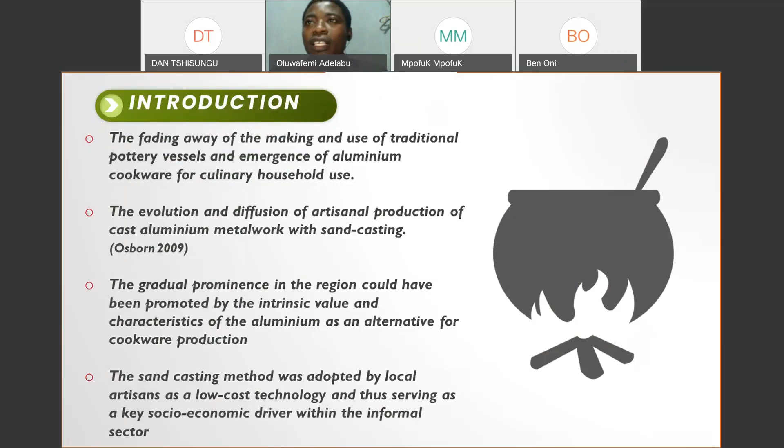With relatively less energy demand, the availability and circulation of scrap aluminum, especially at the end of World War II, enabled artisans in West Africa to develop the craft, particularly the making of aluminum cookware using scrap metal. So the craft and trade of aluminum cookware has grown and diffused into communities all over West Africa, including Nigeria. The sand casting method was adopted by local artisans as a low-cost technology, thus serving as a key socio-economic driver within the informal sector.

Today, the impact of the product life cycle on human and environmental health has become a salient issue that also needs to be addressed within the artisanal aluminum industry, with growing public concern on the safe use of aluminum cookware and an expanding amount of research showing aluminum as a potential source of toxic contamination in food.

The artisanal aluminum cookware industry is faced with a unique opportunity for technological innovation, or face technological discontinuity. Aluminum cookware produced in Saki was identified for this study, although previous studies have considered aluminum cookware made in four selected locations in Nigeria.

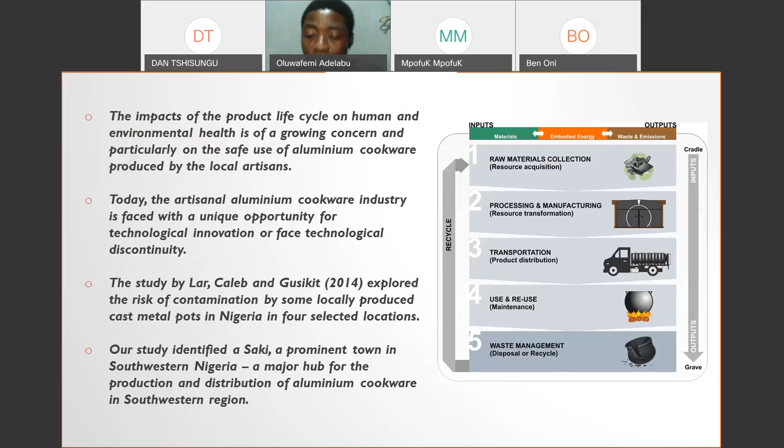We are focused on this particular town because it's a prominent town in southwestern Nigeria and a major hub for the production and distribution of aluminum cookware in the southwestern region and beyond. This is the context of the study in the Nigerian map, and Saki is located at the northern part of Oyo State in southwestern Nigeria.

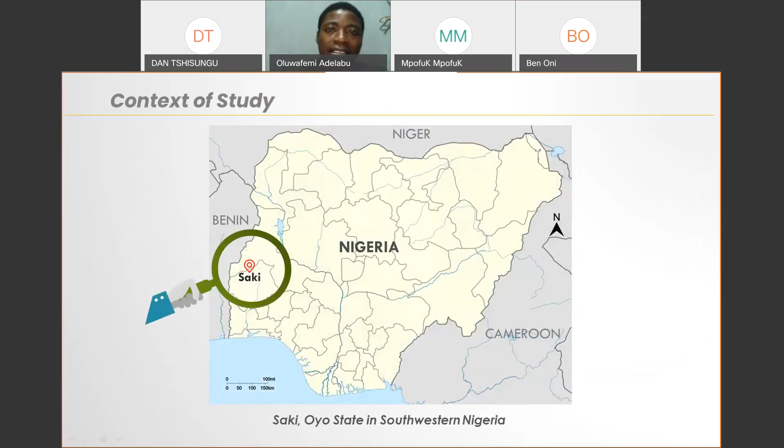Artisanal cast aluminum cookware: casting is a type of metalworking that involves pouring molten aluminum into a mold to duplicate a desired pattern. Compared to other methods such as die and permanent mold casting, sand casting is a slower process, but it's considered versatile, more economical, and probably the easiest for intricate designs.

Sand is used as it can easily be packed into any shape and achieve desirable properties such as high permeability and resistance to high temperature. In Nigeria, sand casting has become a widely used method of forming aluminum into products by artisans who adopt a labor-intensive process, harnessing scrap aluminum into a range of functional household products, notably the cast aluminum cookware examined in this study.

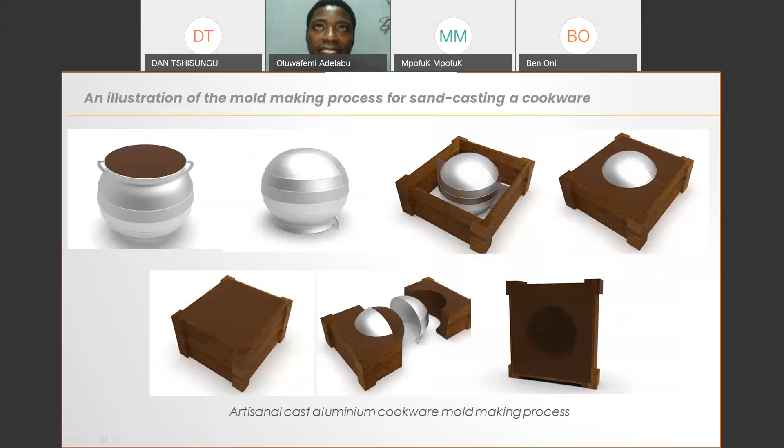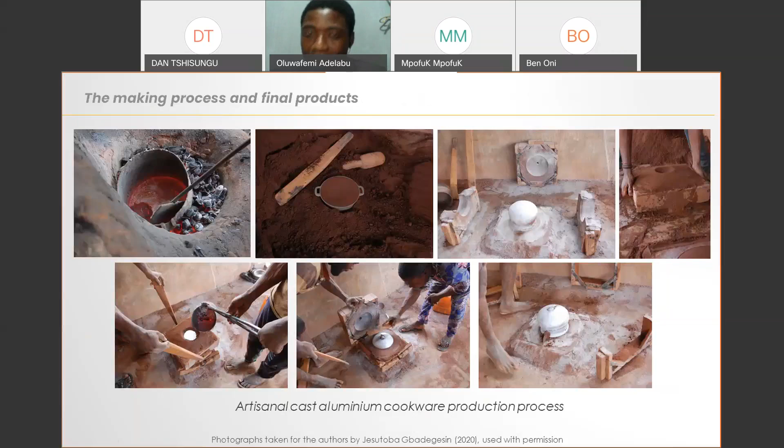There are several health effects that have been associated with exposure to heavy metals, especially through aspiration and oral intake, as pointed out in previous studies, such as that of Flora, Gupta, and Tiwari 2012, as well as Taylor, Kordas, Golding, and Emond 2017.

Manufacturing industry, including mineral processing and recycling activities, has been identified as a source of exposure to heavy metals in the environment. Aluminum is a metal that is not essentially needed for humans, as opposed to other mineral metals such as iron, magnesium, and zinc. But due to its ubiquity, human internal exposure and intake are quite unavoidable.

The informal sector dealing with recycling of metals has been identified as one of the potential sources of metal poisoning in developing nations, and there have been several studies that have pointed this out.

While there is a growing amount of evidence of the release of heavy metals from artisanal castware, more studies are required to establish the extent to which this situation is actually true, where locally made metal cookware, especially that made from aluminum, is widely produced.

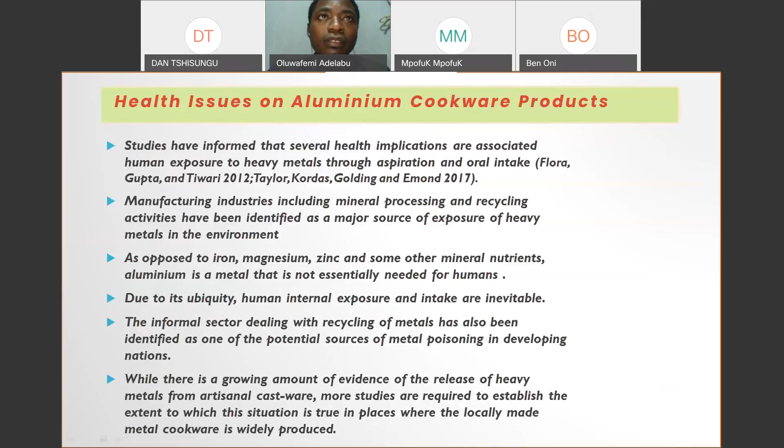In this study, we adopted an experimental method, and we selected experimental samples from cookware—two cookware samples that were specially prepared—and two commonly used additive materials. The cookware samples were subjected to water quality analysis, while all samples were characterized for chemical and microstructural properties using SEM EDX.

SEM EDX refers to a Zeiss Sigma field emission scanning electron microscope, equipped with both backscattered and Oxford energy dispersive X-ray detectors. The SEM EDX analysis was used to identify the elements present in the cookware, to confirm whether there are any contaminants, as listed by the World Health Organization, other than those expected in the core material.

So I would like to present the results that we got from the water quality test. The two cookware samples were used to boil a predetermined amount of water, and then the water was at the boiling point. The water was poured and cooled, and then the water was tested using the following parameters.

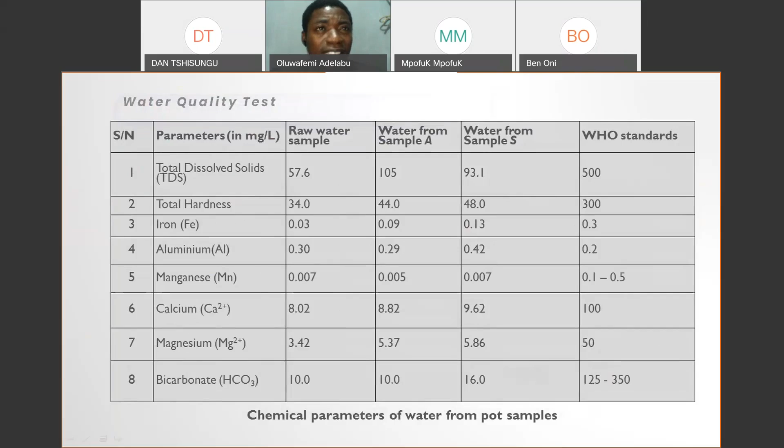For instance, for aesthetic and physical parameters, we tested for appearance, odor, temperature, pH, turbidity, and conductivity. And then for the chemical parameters, we tested for total dissolved solids, total hardness, the presence of iron, aluminum, manganese, calcium, magnesium, and bicarbonates.

These are key findings. The result from the water analysis indicates the release of mineral elements and ions from the cookware samples. However, the rate of contamination was noted to be higher for cookware sample S, and cookware sample S was actually prepared with the additives, whereas cookware sample A was prepared without the additives. So the rate of contamination was higher for cookware sample S across all the parameters, except for the measure of total dissolved solids in sample A.

The factors responsible were not established due to the limited range of tests conducted for the combined total of organic and inorganic substances present in the water sample. So overall, the level of migration of metals and metallic ions into the raw water can be considered to be minimal, in that their parameter values did not exceed the limit set by the WHO for water quality standards.

For instance, the transfer limit of 5.0 milligrams per liter for aluminum, as recommended by the Council of Europe 2013, is not exceeded even with the initial raw sample containing 0.3 milligrams per liter of aluminum. So the water test experiment was delimited, as the study did not consider acidic food conditions.

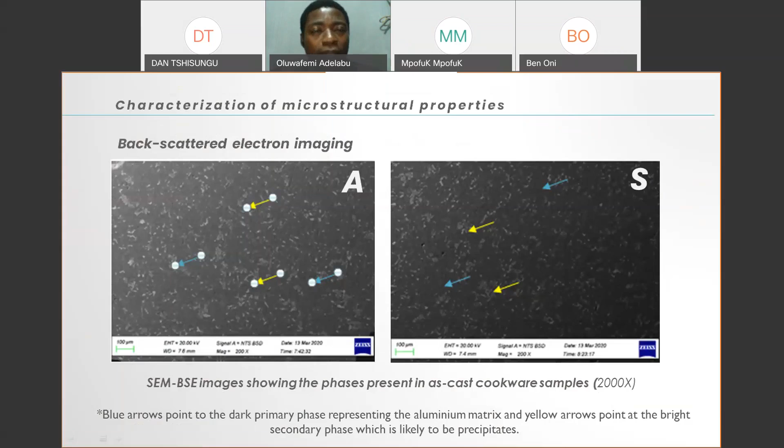So the characterization of microstructural properties using backscattered electron imaging is shown on the screen. Here we have the image from sample A and then from sample S. The blue arrow there points to the dark primary phase representing the aluminum matrix, while the yellow arrow points at the bright secondary phase, which is likely to be precipitate.

Now, these are the images of additives for casting the cookware. Here we have the wrought aluminum alloy, and then we have the black powder from the carbon zinc battery. Now, based on our findings, it can be seen that there were two phases, the light and the dark, which were predominant. The dark phase represents the primary alpha aluminium matrix, while the light phase represents a secondary phase, which is thought to be precipitate.

This precipitate enhances the mechanical properties and thermal resistance of aluminium alloy. Similar phases were found in the wrought alloy, but the precipitate preferentially settled at the grain boundaries. In the microstructure of the black powder taken from the zinc carbon battery, the bright spot areas were thought to be contaminants, as shown also in the image.

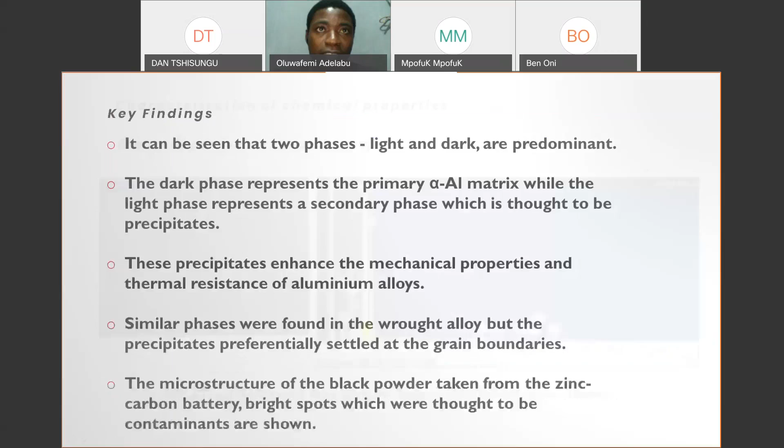Can you quickly hasten up? You spent time. All right.

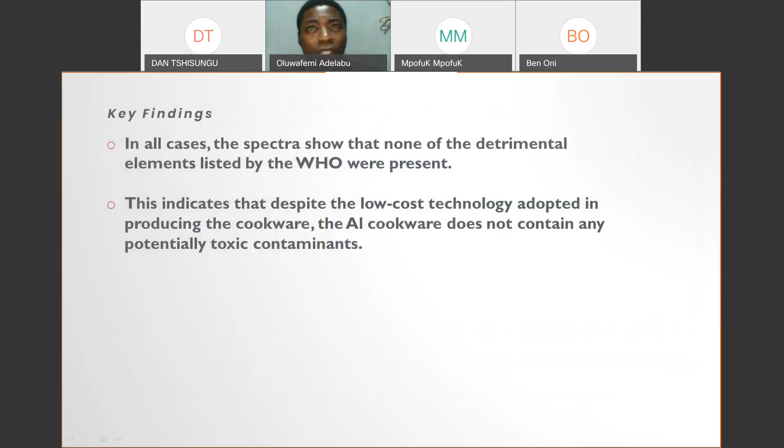All right. So we also did the characterization of chemical properties, and we did that for all the samples. Basically, in all cases, the spectra showed none of the detrimental elements listed by the WHO were present. And so this indicates that despite the low-cost technology adopted in producing the cookware, the aluminum cookware does not contain any potentially toxic contaminant.

So our concluding remark is that the preliminary test indicated that no significant release of mineral elements from the cookware was observed in case of contact with boiled water. Then the EDX result did not reveal any of the heavy toxic metals which had been declared toxic by the WHO. Now, however, we admit that further testing is necessary to evaluate the leaching effect that might be caused by cooking acidic foods such as grains and also alkaline foods such as fruits or vegetables.

So in the near future, further characterization and testing will be undertaken to ascertain the safe use of aluminum cookware, especially produced in Shaki Town. So for now, our work has demonstrated that high-tech science can be used to evaluate the work of informal artisanal production systems, and thus can support local small-scale industrial growth through safe and sustainable practices.

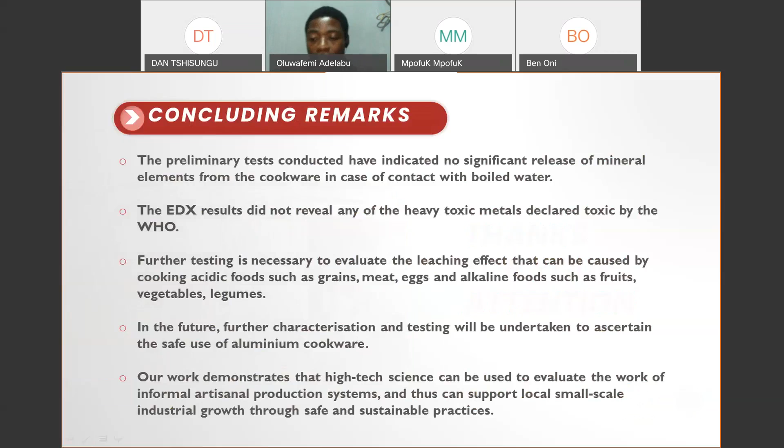Hello, can you hear me? Hello, Dan. Can you hear me? The audio is not very clear, actually. I also got feedback from some of the members in this room. The audio is not clear, so we cannot hear what you're saying. Okay. But if I can respond, yes, it's maybe clearer now. Okay.

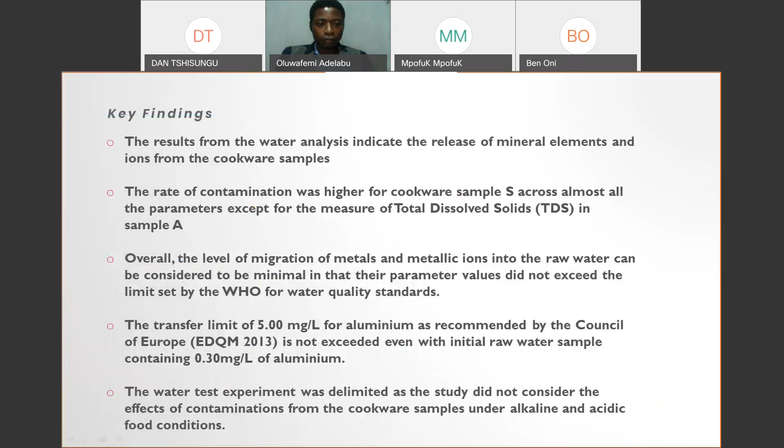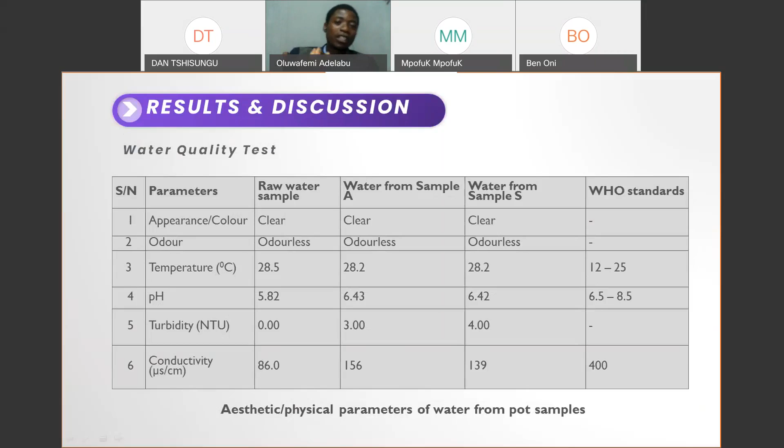Yes, if you look at the pH of the raw water sample that we used, I think that was the cause, because we had a very low pH for the raw water sample. So if the pH of the raw water sample were, let's say, 6.5, then of course the migration or the effects of putting it in aluminium, either in the condition of sample A or sample S, would still have fallen within the WHO standards. Yeah, I understand. That means you are saying we should improve the pH of the raw sample. Yes, so if we are to do further tests, we would ensure that we use water whose pH is within an acceptable range.

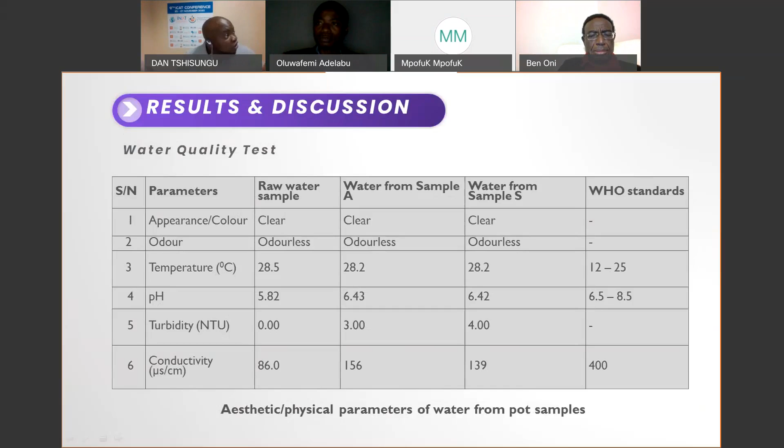Okay. My second comment was not a question. It's more of a recommendation that future research should consider sustainability assessment of cast aluminium cookware production, considering the fact that it is an indigenous technology in the country. And I'm interested because I know opportunities like this in manufacturing are scarce in the nation. So sustainability assessment in terms of looking at indicators like environmental, social, economic, technical, and the likes. All right.

Thank you very much for your contribution, sir. Yes, sir. I think I have a small question. Okay, sir. The source of the raw material, is that consistent or constant, or does it vary? It varies, sir. It varies. Okay. How do you reconcile the various sources to the results you're getting? Is your result from a particular source?

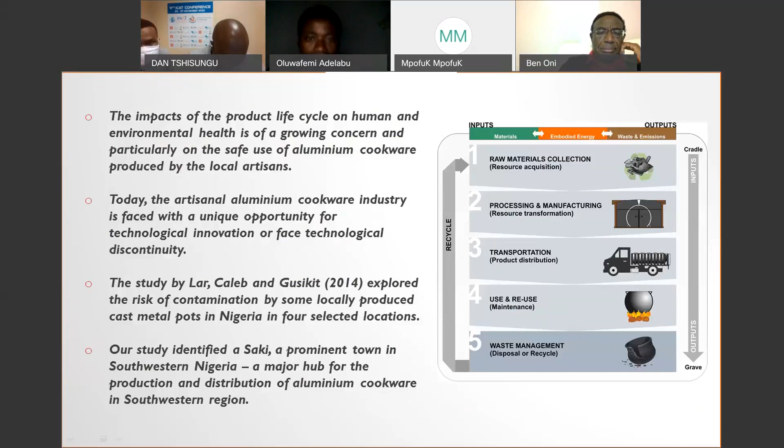Hi, yes, Ivan Brown here. Okay, sir. Can you see me there? Can you make me a panelist, please? Yes, we are doing that right away. Thanks. So you can share your screen now. Okay, let me give it a try. Okay. Yeah, we can see your screen. Okay. I think it's just the wrong side. Let me try again. And how do I get back now? Screen 2, there we go. Okay, I'm almost there. Is that correct? You can see my first slide. Yes.

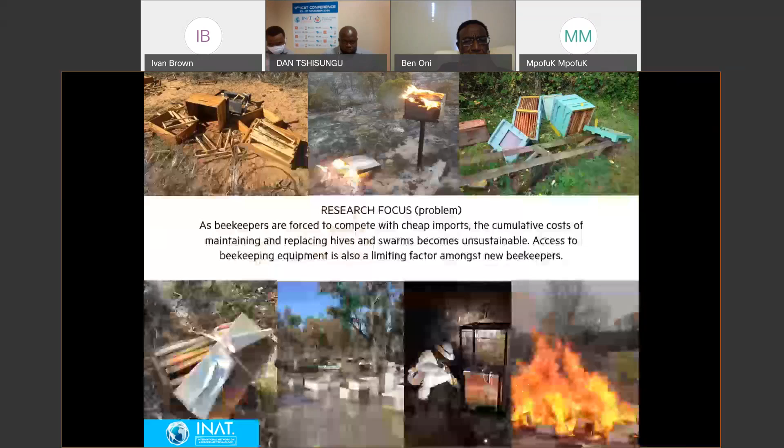The beegin project is based on the problems within the beekeeping industry. This is a very complex field that lies at the intersection of humans and insects, and which we rely on to sustain our food supplies. To summarize it very briefly, beekeepers keep bees in wooden boxes called beehives. Beekeepers have a tough time keeping these beehives and the swarms inside them alive and in good condition. They face various threats like theft, vandalism, fires, honey badgers, weathering, timber prices, and so on.

Beekeeping for development projects also struggle to achieve good results due to much of the same reasons. There are systemic issues at play involving industry policy and lawmaking at a higher level, but there is also a fundamental technology issue at the base level, which is where industrial design could really get involved.

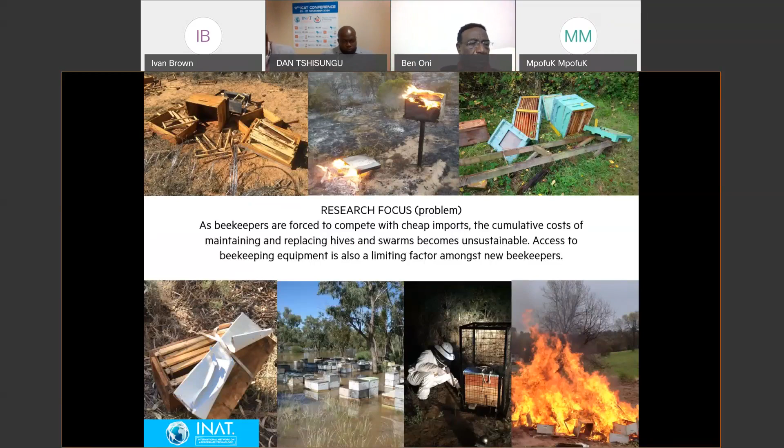The traditional beehive is a Western technology, the most commonly used one being the Langstroth style. It comes from Europe, and it is failing to achieve the desired results in the context of developing nations all over, not only South Africa. Appropriate technology became a core part of the research framework from the start, largely because of this fact, and this excerpt from the paper sums it up quite nicely.

From the initial research into appropriate technology, we honed in on two of its principles that guided the design research going forward: accessibility and sustainability. Accessible technology is affordable, ownable, operable, producible, and controllable within the community it serves. And sustainable technology is socially, economically, and environmentally maintainable and uses natural resources, capital, and labor as they are available for the long term. These spoke nicely to us in the beginning and came through all the way through the research project.

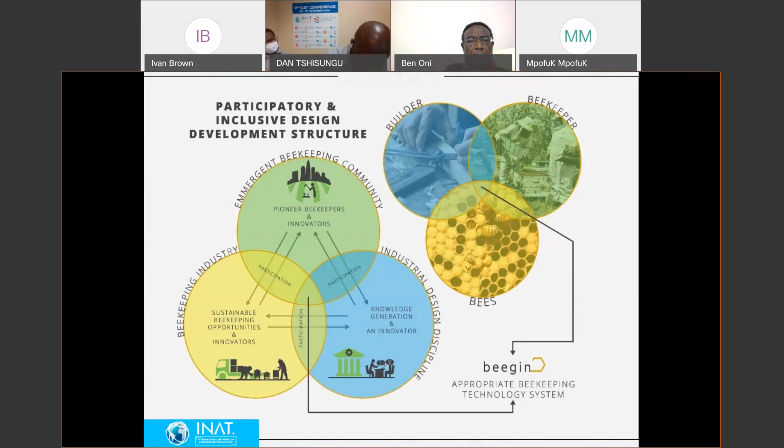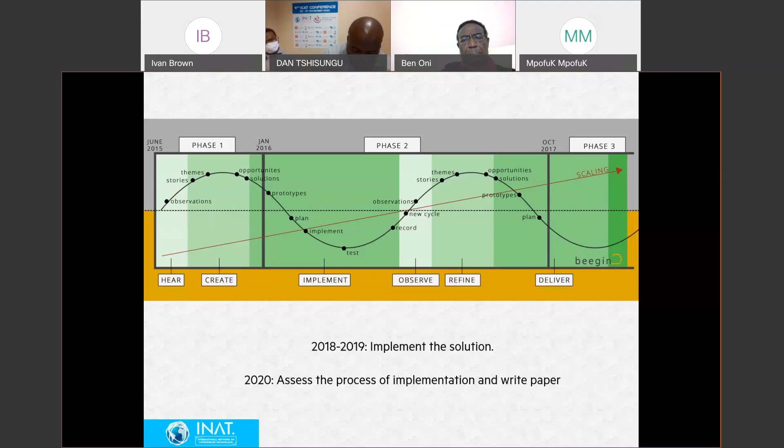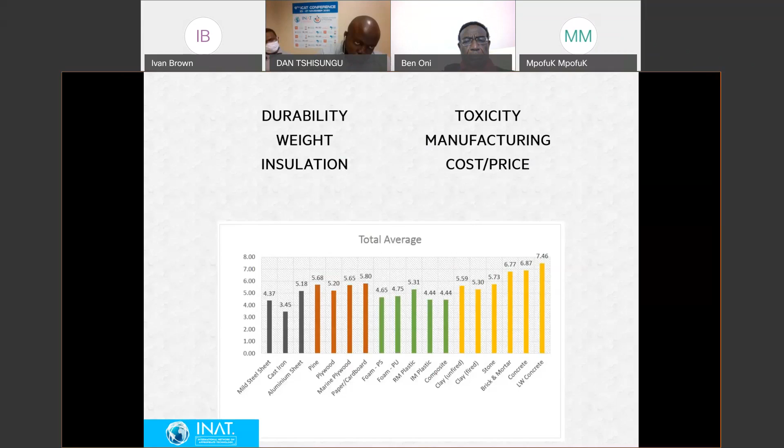To summarize the first phase of the research, we ended up looking at new materials for beehive production, assessing them based on 6 areas, each with their own very complex criteria. The result was that concrete, and more specifically lightweight concrete, came out on top. You can see it on the far right of the graph. This led to the design and production of a lightweight concrete beehive, which would be durable, lightweight, insulating, non-toxic, and low cost, meaning the bees and the beekeepers liked it, thus satisfying the sustainable technology side of the equation.

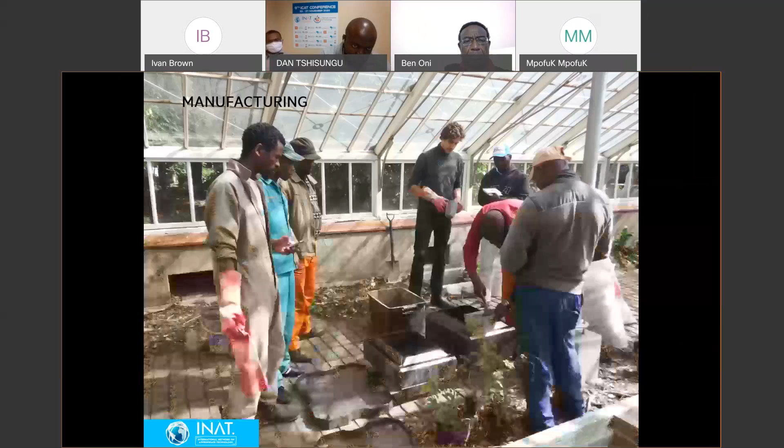Achieving accessibility lay in the manufacturing side of it. The material, lightweight concrete, was ideal because it lends itself to low-tech off-grid manufacturing. All kinds of problems could be solved by designing a set of molds that would make the beehive. This would give beekeepers and farmers the ability to make their own lightweight concrete beehives with limited technology, tools, and skills. A new idea, appropriating concrete precasting technology, has been making serious impacts all over rural areas and developing nations.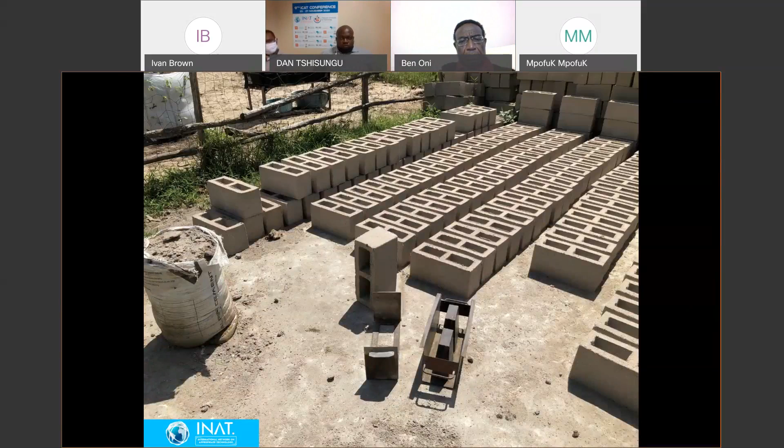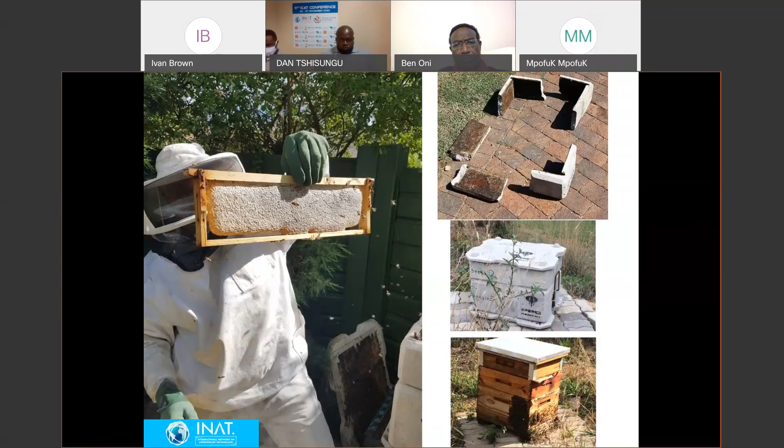I've skipped through large portions of the research to get to the crux of the paper and what we're really interested in talking about. But basically from 2016 to 2018, I worked with a range of professional beekeepers and farmers as participants in the research, and we tested the version 1 molds and beehives. Results of this initial field testing were largely positive, but there were a lot of issues we needed to refine in order to produce something that would function in a real world environment and satisfy all of these various requirements. So to solve these issues, we developed a system of categorizing the criteria and arranged them by their prevalence.

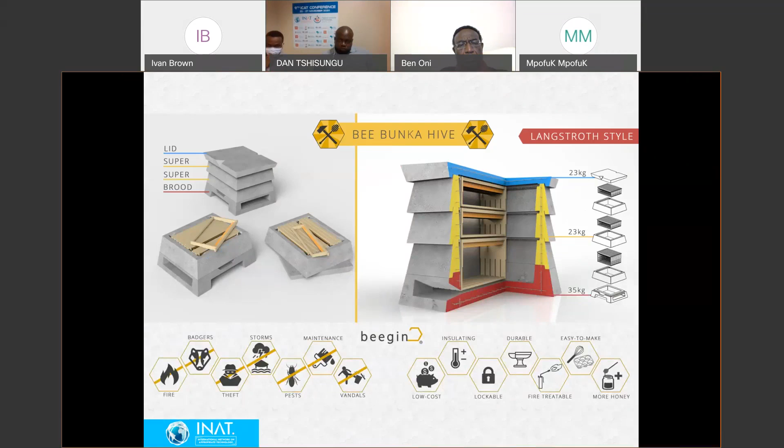To summarize, in the end it was a matter of balancing all of these requirements from each area, and looking at which was more important and which would guide the development of the technology from the top down towards the end, which would be the implementation system. This is really the end result. It's called the Bee Bunka, the lightweight concrete beehive. Really revolutionary because it's made out of lightweight concrete, and it takes all of the best parts of the European beekeeping system and improves the rest to function optimally in a South African context.

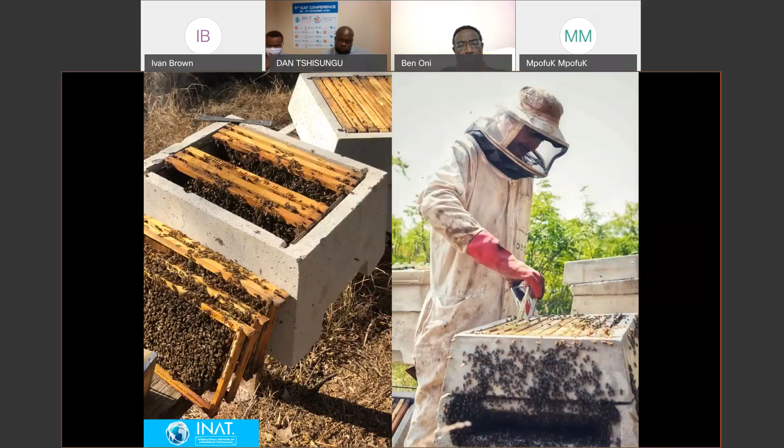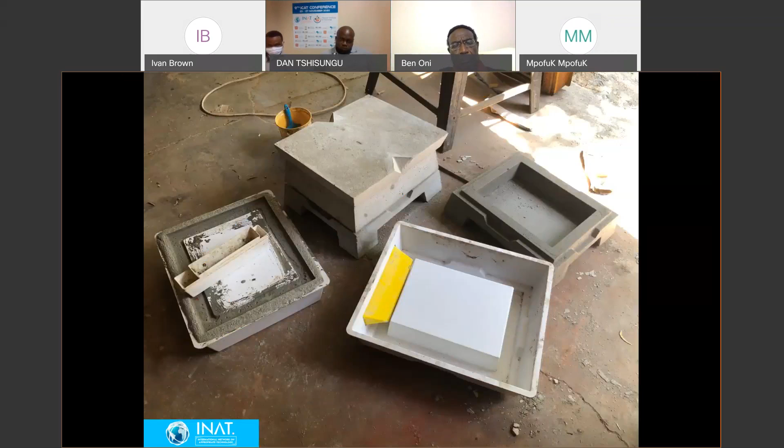We've been testing these now for over 4 years, showing that they do solve a range of the issues we were looking at. But importantly, the outcome included a set of molding tools and instructional media to help anyone from anywhere start making these beehives. These are the molds. They are low cost and capable of making hundreds of beehives. They are fairly simple to use and based on a 1-part tray mold, which is basically an ice tray mold. And this is where the true appropriate technology element lies. The beehives are not the end product. The product is the ability to produce the beehives.

To achieve impacts, we would need to get these beehives out to as many people as fast as possible in order to improve beekeeping industries all over the show. And by selling the molds rather than individual beehives, we could see an exponential increase in the adoption of the technology, because each person with a set of molds would be producing hundreds of beehives. While this is a good appropriate technology approach, it is a fairly unconventional business approach. It leads us to the implementation phase. The molds, the beehives, and a completely hypothetical business plan for implementing this as a commercial business formed the final outcomes of the master's research.

What remained was for me to get this technology into the hands of the masses. In 2018, I registered Beegin as a private company, choosing commercialization as the most desirable implementation route. The project could potentially have gone on in the university environment, scaling the project and accessing further funding, but we had a few reasons to decide against that route. For instance, whether Beegin would survive as a sustainable business would not be tested in a university scenario.

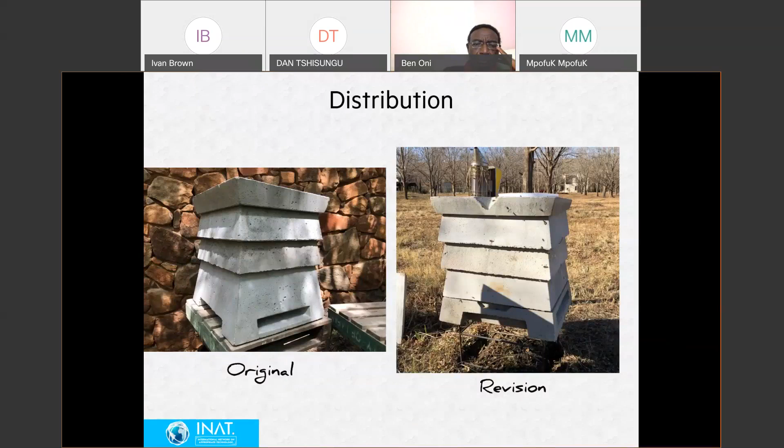Okay, so we run through financing, and then we finance through selling the beehives. Then manufacturing, there were some interesting settlements that had to be made on the manufacturing side. Distribution, we had to edit the design and the system a little bit to fit in with international distribution systems.

And then we kind of close up with training and adoption and how it's gone from 2018 to now, with people adopting the technology and developing their own systems for using this new technology in their businesses, and how we've been sort of adjusting Beegin as we go along with it.

In the end, basically we're in 15 countries with 155 mold sets. And so the impact is starting to be seen, although the business has been scaled at a very staggered and slow pace, which is part of why perhaps it's managed to get to where it is and not fail in the first couple of years.

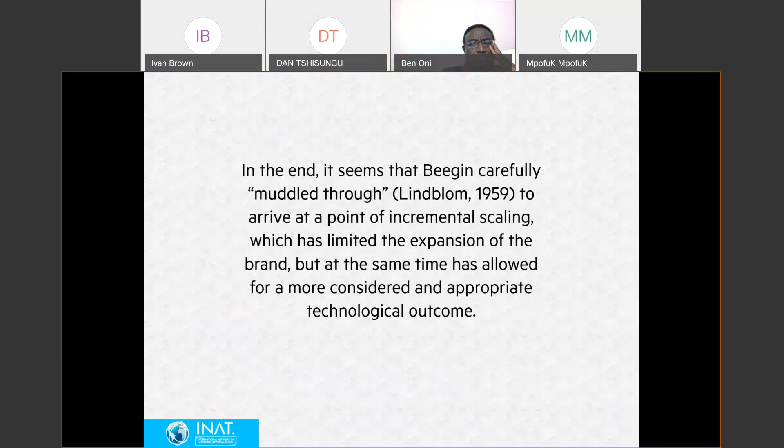So I guess this kind of sums it up. In the end, it seems that Beegin carefully muddled through to arrive at a point of incremental scaling, which has limited the expansion of the brand, but at the same time has allowed for a more considered and appropriate technological outcome. Yeah, thank you.

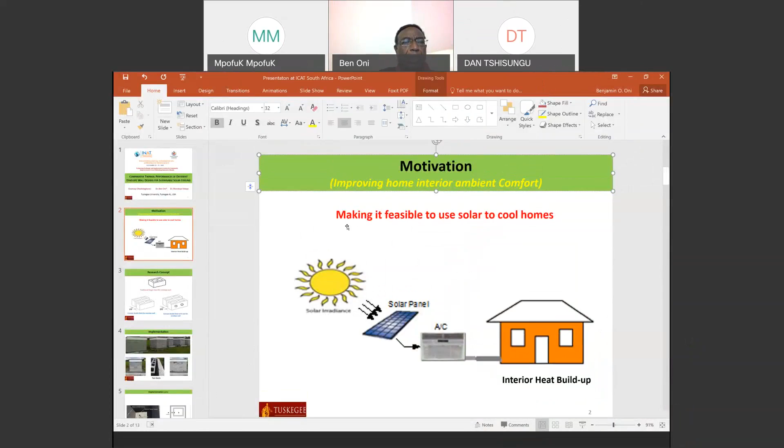All right, good afternoon over there, everyone. The title of our presentation is Comparative Thermal Performance of Different Envelope Wall Designs for Sustainable Solar Cooling.

The motivation for this project is actually to improve the interior ambient comfort in African countries. We want to make it feasible for solar to be used to cool homes. We have a lot of heat in Africa and a lot of sunshine as well. The heat from the radiant energy from the sun produces a lot of discomfort in homes.

But at the same time we see the light coming from the sun as well, that it can be used to cool the homes. But the way we build homes right now in most of Africa using cement block, it is not actually financially feasible to use solar to cool the homes. It's going to be so expensive because the blocks serve as a heat reservoir. So when the sun hits the walls, the energy is stored into the bricks, and the energy is released later in the day and at night, and it makes it very uncomfortable for people to enjoy the ambient temperatures.

So what we thought we should do is find a different way to arrange how the envelope walls are configured. In industrialized countries, this is not a problem. They can always use insulators. It's plentiful, and the way they build in industrialized countries is such that they can always add insulators in the process, so it's not a problem for them.

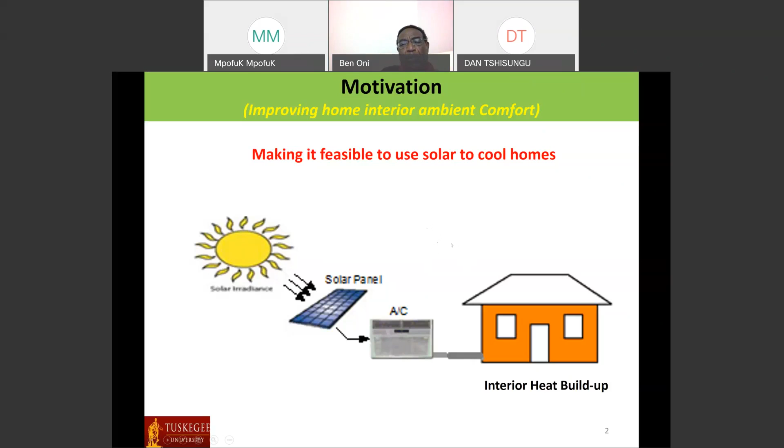But in most of Africa, I haven't seen that abundance of insulators, as well as the way we build using cement blocks, where you can actually put that insulation. So we thought we should use a concept of double walls, and then see financially how that would compare with the single wall, and at the same time cooling it.

So traditionally, you see the single wall. This is what is used for the outside of the house, or the envelope. So we're thinking, instead of using a single wall, why don't we use a double wall with a space on it, and that space acting as a heat barrier. And also, why don't we put a hole in the outside one to take advantage of convection? So these were the plans that we had.

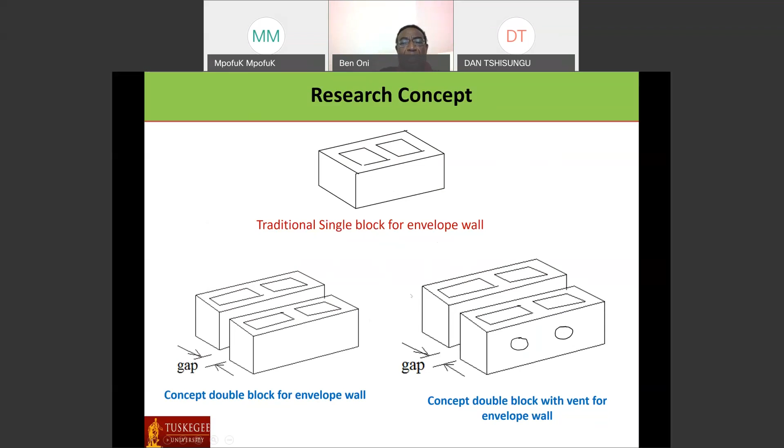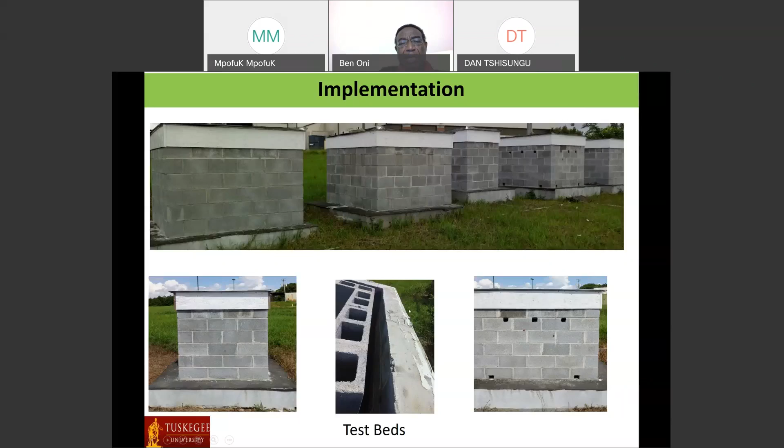So we decided to implement it, and here you see where we actually built different mini structures, double walls, some of them with holes on it as well, some without holes, some with different sizes of separation. We just wanted to know the impact of how wide these spaces are and what that means in terms of energy reduction. So we built this, and in the process we had sensors installed in many different places in many structures. We had sensors on the wall, a sensor right in the middle, and a sensor outside.

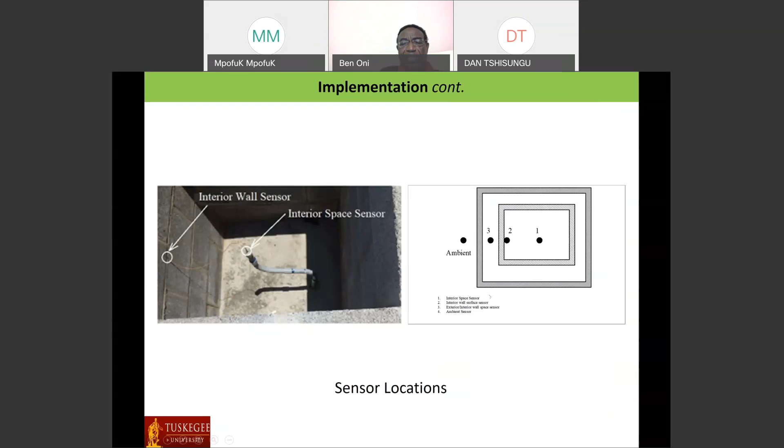So this right here illustrates where we had our sensors: in the middle, in the wall, in between the exterior and interior walls, and then of course on the outside. So that's where we install our sensors. And we took readings for several months and days and nights, and we took the averages.

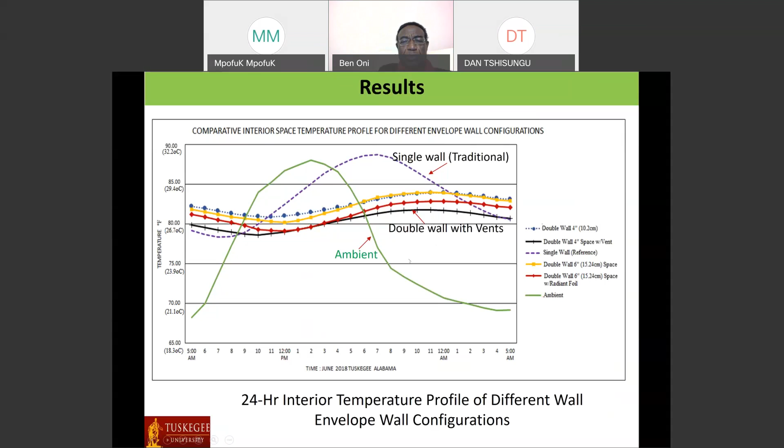So using this, we took the best of the different configurations. That's double wall with vent. There were other configurations I may not have focused on, but there were double wall without vent, double walls that were 6 inches apart, double wall that was 4 inches apart. So we had different configurations, but the best of them was the double wall with vents, staggered vents.

So you could see, if we pull them together, you could see the temperature profile over a 24-hour period, the average of a double wall with vent. The temperature really never got, this one got to maybe about 84 or 83 degrees, whereas for the single wall, it got to about close to 90 degrees.

So in our analysis, we established, I guess, a level of comfort. We call it comfort zone, 75 degrees. This is arbitrary, just to let us know how much energy we're talking about inside the house using the different configurations.

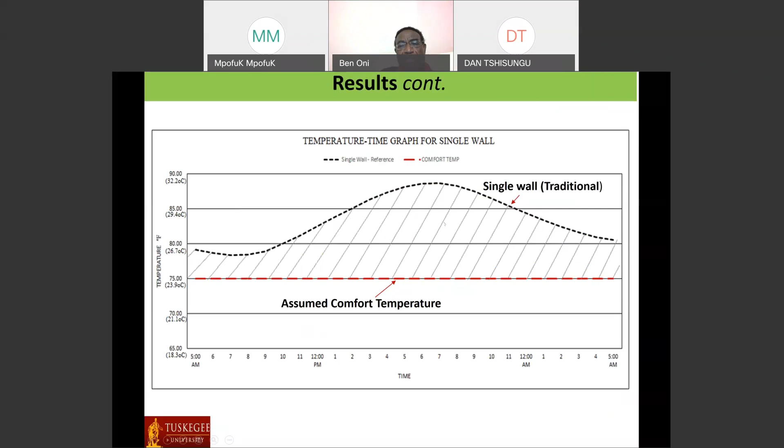So we compare that for the various configurations. And after we did that, when we did some cost calculations, for the single wall, for example, the traditional one, we see in our calculation what it will cost us to buy the solar panels. For the double wall with vent, this is the difference in cost, about half of that. For the double wall without vent, this is what it will cost. For the double wall 6-inch spacing, that's the cost, and so on.

So we had this analysis. This also impacts because of the cost of the solar panel, which is one of the calculations we made, but there was also the cost of AC that we needed to take into consideration. Because of the higher energy that is stored when we use a single wall, obviously the AC unit will be bigger, and that is the cost. And for the double wall with 4-inch vent, you see that the size of the AC unit will be a lot smaller. So we did all the calculations as well.

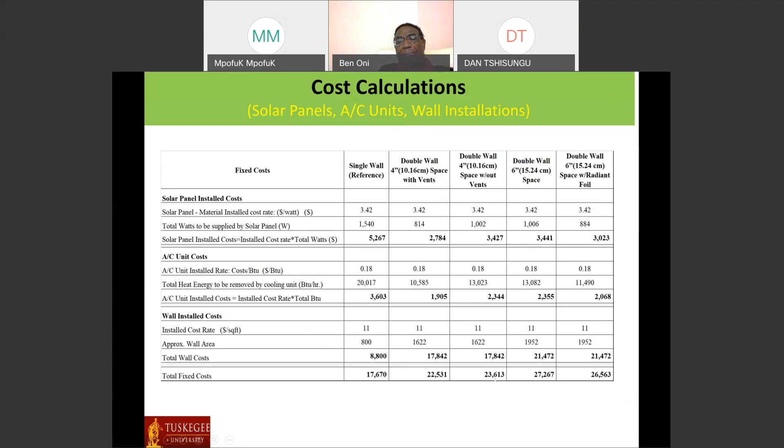And then we also did a calculation on the installation cost. So we see that for a single wall, for example, this is our cost, whereas for a double wall, the cost actually about doubles or so, or quite higher. So we did all of these calculations.

And then we went further now to say, okay, if I had these different walls side by side, and I was going to operate them 24 hours a day and maintain a temperature of say 70 degrees or 75 degrees, what will it cost to cool the house? So in terms of energy, we find that there is an annual operating cost. It will be much higher for the single wall because I have to remove a lot of energy internally.

But for the double wall with vents, I don't have to remove as much energy because in the first case, I did not have as much energy. So we compared all of them. So this now gave us the cost of operating the house.

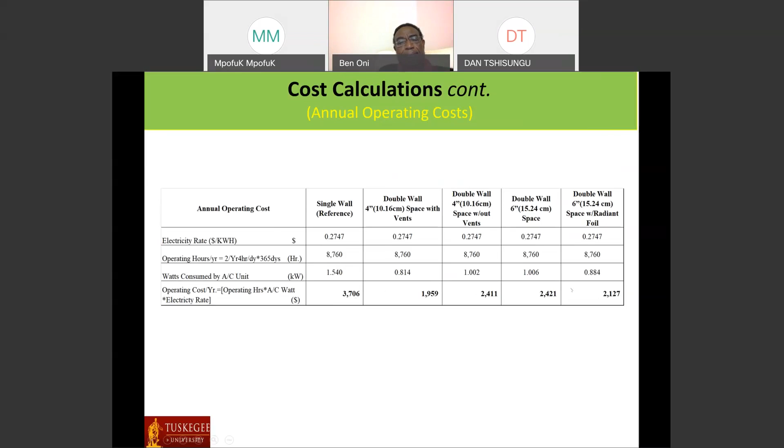12 minutes have been fast spent. Can you quick round up, Doc?

How many minutes did you say, please? Twelve minutes have been fast spent. Oh, twelve minutes already, okay. All right, so I'm almost done, actually.

We took into consideration the fixed cost and the operating cost, and we projected that with time, just to find a break-even point.

For the case of the single traditional way we build in most of Africa, which is the red line here, and the double wall, which is the black line, the cost starts up a little bit lower, but with time, taking into consideration the energy cost, you see that it goes much higher.

The black dotted line here is the cost of the double wall with vent. The cost is slightly higher initially, but you see that with time it's less than the energy cost we're using for the single configuration.

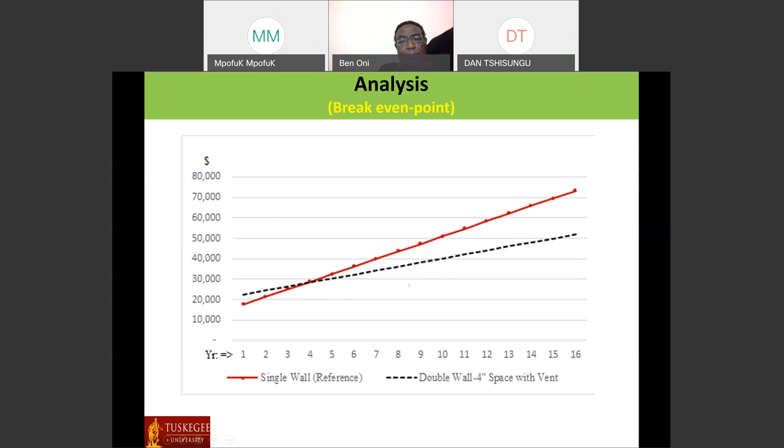So to conclude, the study focused on an environmental temperature of 75 degrees and above. The experimental data we collected shows that the building interior of the double wall with vent is about 47% lower than the building interior of a single wall envelope in terms of energy stored inside.

As far as the break-even point is concerned, if we build the house with a double wall, talking about a typical bungalow, and we are electrifying it or cooling it using solar, in about 3.5 years or so we should be able to recover the extra money we put in using a double wall.

We also did a companion study, similar, but using a double roof. We found that if we used the same concept of a double roof instead of a single roof, the attic temperature was reduced by about 12.26 degrees.

So we see that we don't have to endure all of that heat that we do in most of Africa. If we put in a little bit of money to build a double wall and use solar, in the long run we should have better ambient comfort in our homes.

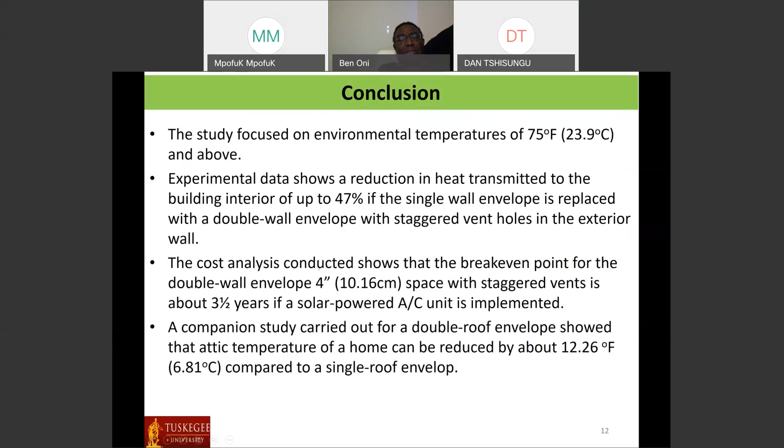So this is my presentation, and I'm open for questions. Thank you very much. You're welcome.

That's a very good presentation. I don't know if there are questions from the floor. Questions, comments, contributions? Good evening.

Good evening. Yes, sir, I can hear you now. You have been trying to speak, but network is not favoring. You are welcome, sir. Okay, I just have a question for Dr. Ben.

What I want to ask is that the solar for the double wall, the solar placed in between the walls, can it be used to generate a source of power?

I mean, yes. If you look at this view graph here, the solar panel is actually used to generate the power, and that power is used to drive the AC. To get to your question, yes, it is a power generator.

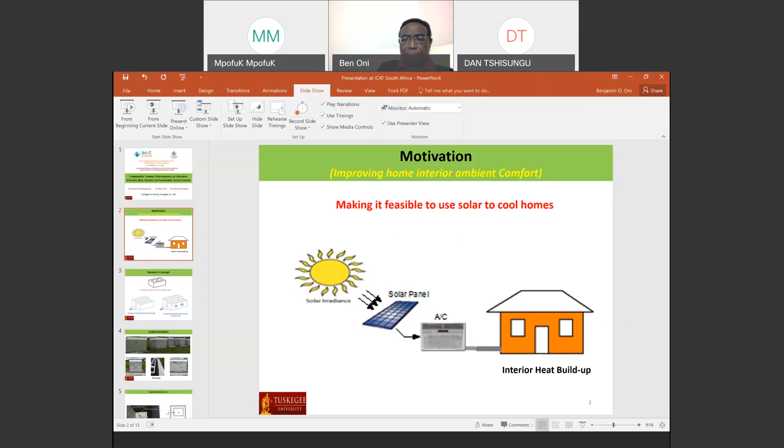Without wasting time, I would like to call the next presenter, presenting article on effects of injection parameters on cavity pressure, tensile, and microstructural properties of plastic reinforced composites. The authors are Adefemi Adeodu, Grace Rendani, and Ilesomidani. I don't know if any of the authors is online. Yes, Adil is available. Okay, thank you so much, sir. Thank you, sir.

So, you can share your screen now. Okay. Can you see my screen now? Yes, your screen is clear. Okay, that's good. Thank you.

Once again, I'm Adeodu Adefemi, affiliated to University of South Africa, Department of Mechanical and Industrial Engineering. I'm presenting on effect of injection parameters on cavity pressure, tensile, and microstructural properties of plastic reinforced composites. The outline of my presentation will be on introduction, the statement of the problem, methodology, discussion of the result, the conclusion and recommendation.

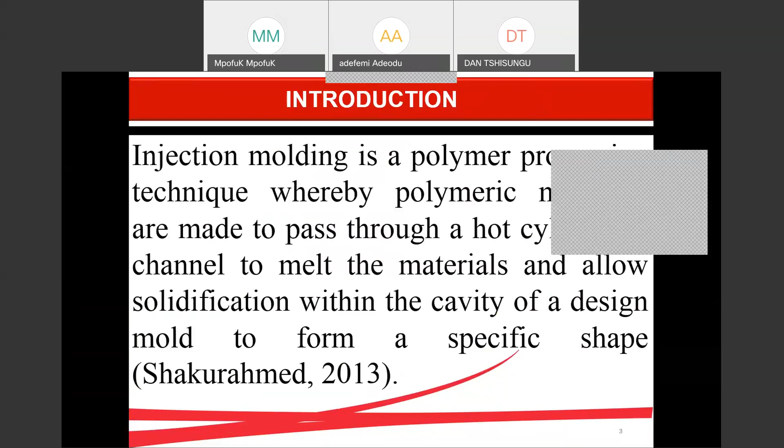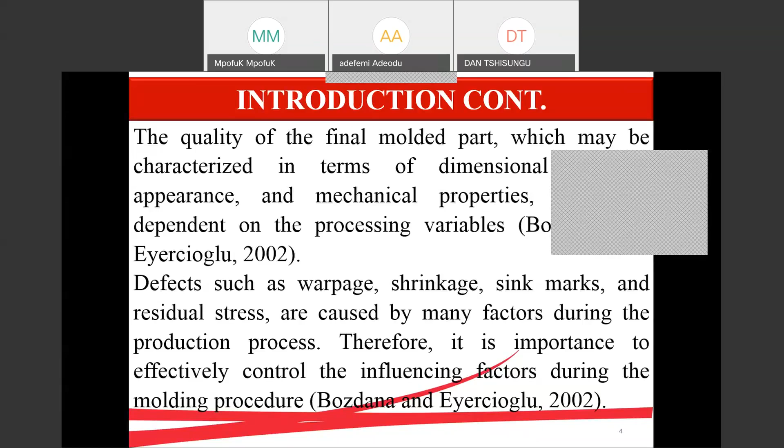But the bone of contention, the motivation of this work, is centered on the defects, the problems that engineers are experiencing as a result of the processing parameters used in injection molding. Defects such as warpage, shrinkage, and residual stress are caused by many factors during production, and it is therefore important to effectively control these influencing factors during the molding procedure, according to Bozdana and Eyercioglu 2002.

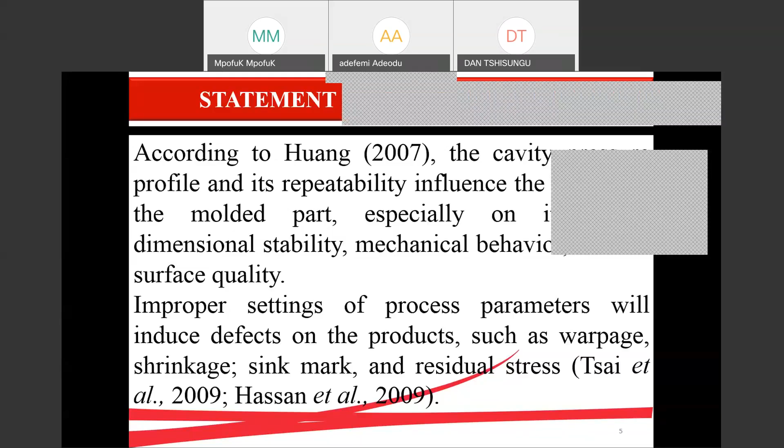So our focus in this research is to look at the effect of these parameters, the injection pressure and time, on the cavity pressure, and also the mechanical and microstructural properties of the product. We are looking at two materials: aluminum mixed with low density polyethylene, and carbon black mixed with low density polyethylene at different injection temperatures.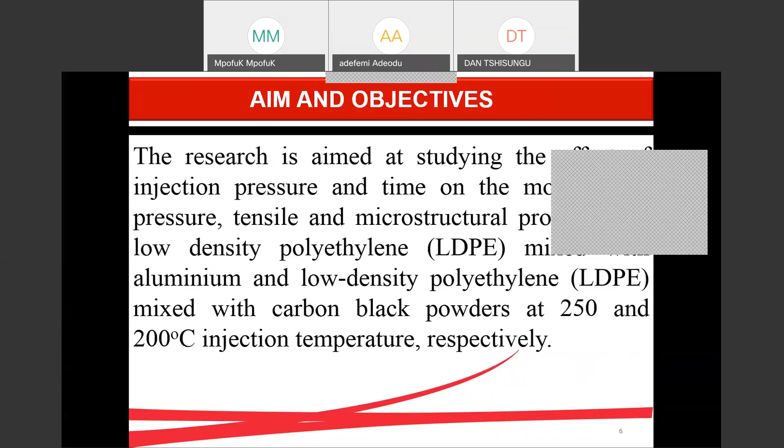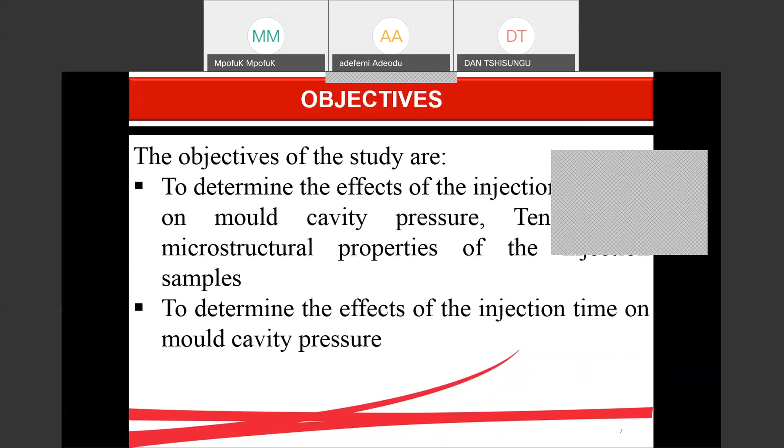So the objective of this study is to investigate the effect of injection pressure and time on the cavity pressure, tensile strength, and microstructural property of low density polyethylene mixed with aluminum and low density polyethylene mixed with carbon black powder at 250 and 200 injection temperature respectively. The objective of the work is to determine the effect of the injection pressure on the mold cavity pressure, and also to determine the effect of the injection time on the mold cavity pressure.

Some work has been done in a similar area by some authors, like the work of Wen-Cheng et al. 2000, which worked on the effect of injection pressure and holding time on the dimension and surface flatness of a specific material, and the result of the work shows that

You have 4 minutes. You have 4 minutes left.

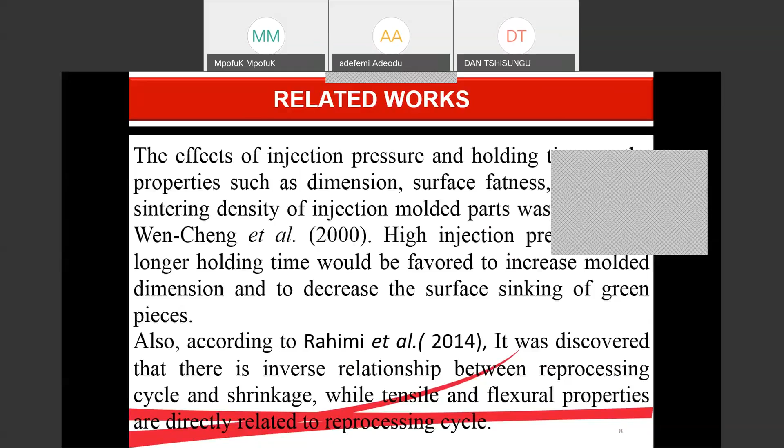Okay. The result of the work shows that when we increase the injection pressure, it decreases the surface sinking of the material. So the methodology we used in carrying out this work is to first of all develop an experimental setup to analyze the cavity pressure, and later we characterize the product, the material produced from the techniques.

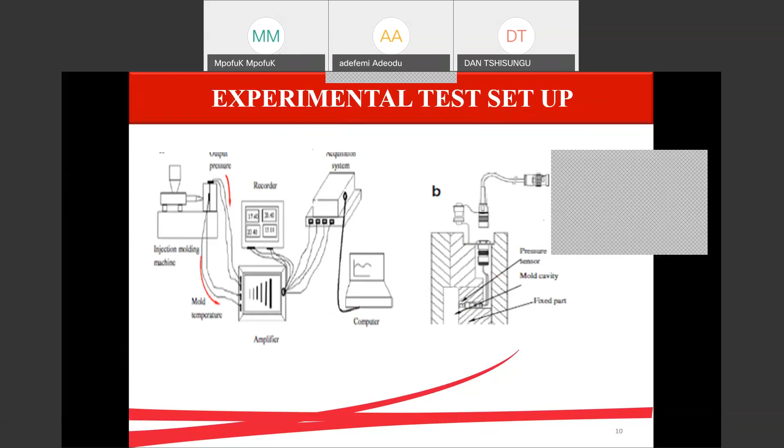This is the experimental setup to measure and analyze the cavity pressure. You can see from the setup at the top left-hand corner the symbol of the injection molding, and there is a pressure sensor. The output of the pressure sensor goes to the amplifier and the acquisition system, which is displayed on the computer.

Now, from the result, we can see that for the effect of injection pressure on the cavity pressure, the higher the injection pressure, the higher the cavity pressure for both materials, but we discovered that the responsiveness of aluminium mixed with low density polyethylene is higher compared to carbon black mixed with low density polyethylene. This is because the injection temperature of aluminum is higher, and this tells on the viscosity of the low density polyethylene aluminum material.

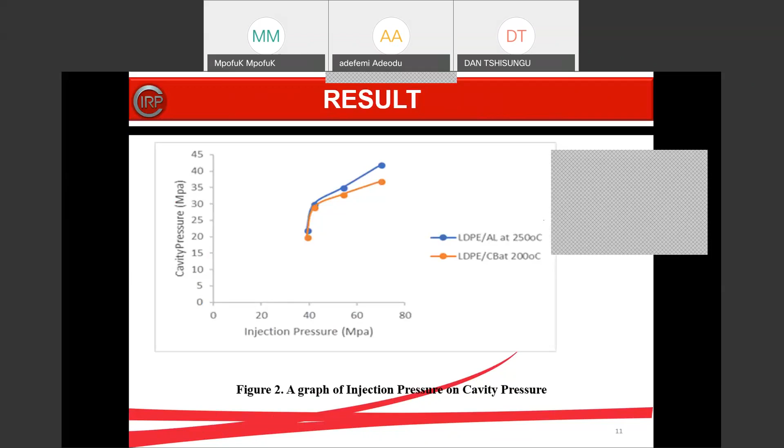Also, looking at the effect of injection time on the cavity pressure, this is inverse to that of the injection pressure. So the higher the injection time, the lower the cavity pressure for both materials. Also, the responsiveness of the material's cavity pressure to injection time is higher for low density polyethylene mixed with aluminum.

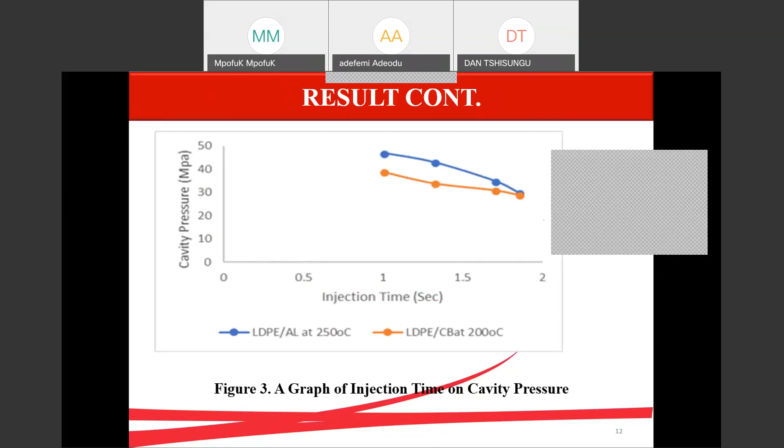Looking at the time. Okay, I'm about to finish.

Also, on the tensile strength, the effect of injection pressure on the tensile strength, we also discovered that the responsiveness of the tensile strength to injection pressure is higher in low density polyethylene mixed with aluminum than carbon black. This is because the surface area in contact of aluminum is higher compared to carbon black.

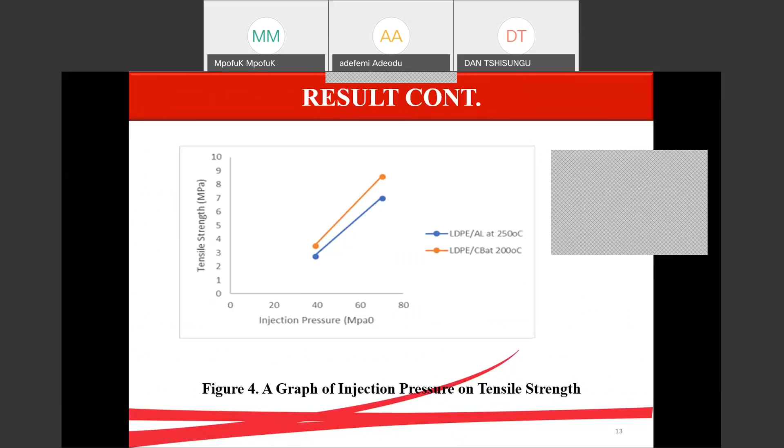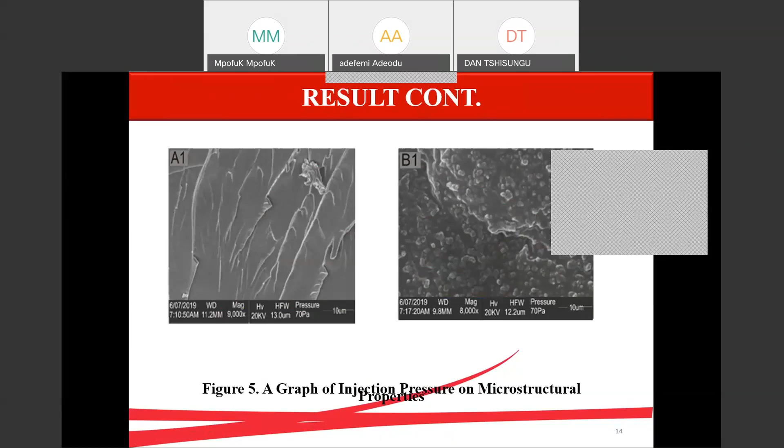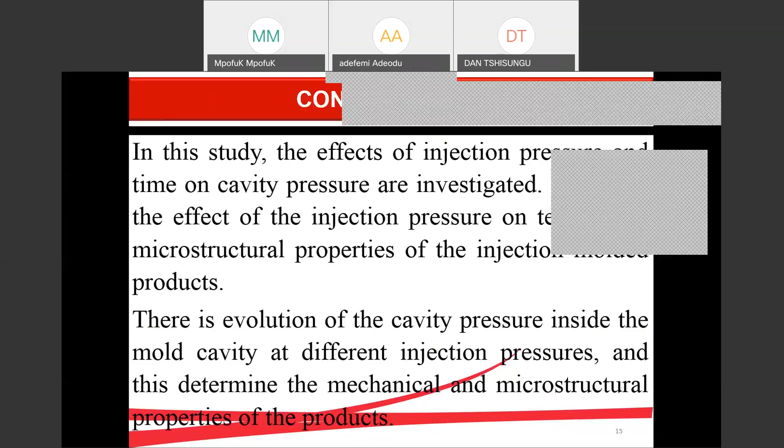In conclusion, the effect of injection pressure and time on cavity pressure was investigated, and the effect of the injection pressure on the microstructural properties of the product was also investigated. We can see that there is evolution of cavity pressure inside the mold cavity at different injection pressures, and this determines the mechanical and microstructural property of the product.